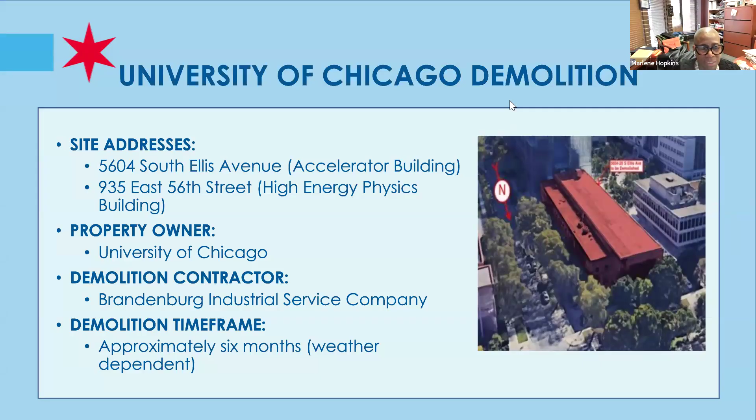The University of Chicago's Accelerator Building was constructed in 1949, and the High Energy Physics Building was constructed in 1967. The buildings house 2 particle accelerators: one Betatron that generated gamma rays and other particles for physics research, and one cyclotron that was at one point the world's most powerful particle accelerator. The Betatron building was decommissioned in 1965, and the cyclotron was decommissioned in 1972. These buildings have since been repurposed for other science projects, office spaces, and other uses for the university.

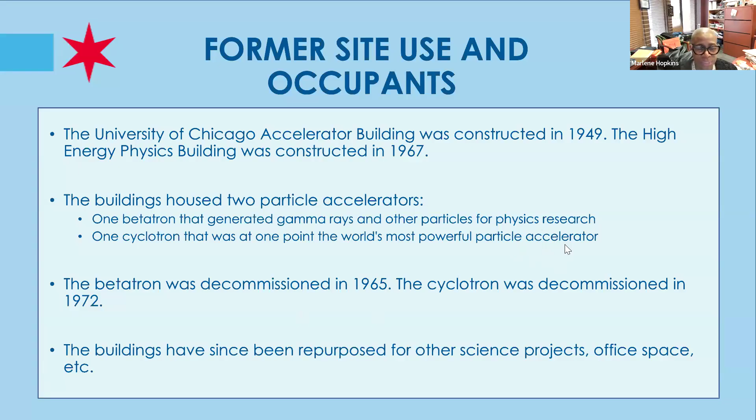The Department of Buildings required the contractor to submit a structural condition report, which details the current structural integrity of the building. They were also required to submit a safety and operation plan that details compliance, describing how the project will comply with the applicable requirements of Chapter 33 of the Chicago Building Code. We also were responsible for performing a preliminary inspection, known as the pre-demolition inspection.

We will have an inspector on site during the entire time the demolition work is in progress, and we will also perform a final inspection once demolition is complete. I would like to note that the structural condition report and safety operation plan are submitted to the department, stamped and signed or designed by a licensed architect or structural engineer, and the site operation plan can also be prepared by the demolition contractor.

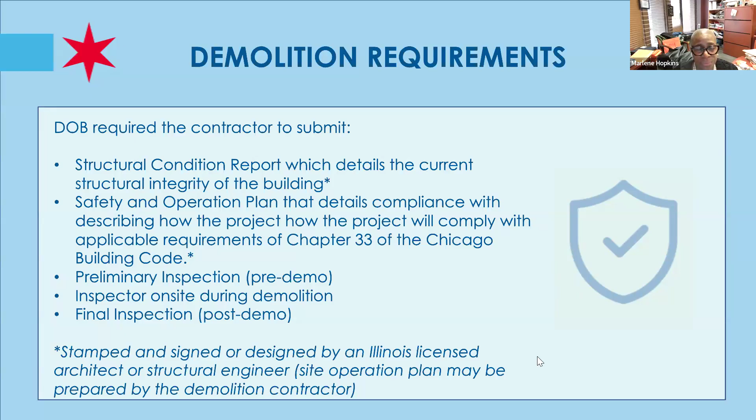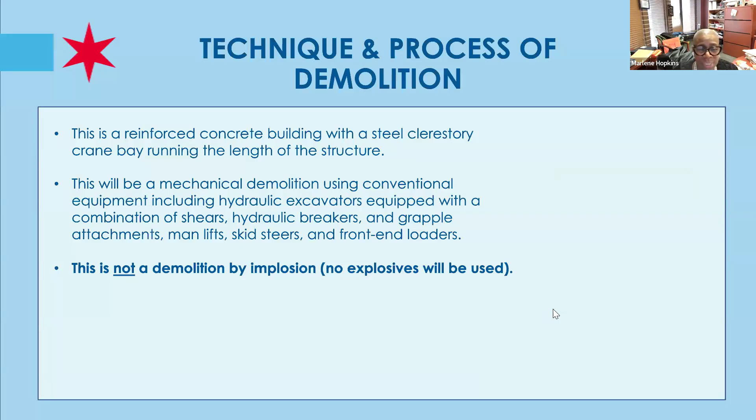This is a reinforced concrete building with a steel clerestory crane bay running the length of the structure. This will be a mechanical demolition using conventional equipment, including hydraulic excavators equipped with a combination of shears, hydraulic breakers, and grapple attachments, man lifts, skid steers, and front end loaders. This is not a demolition by implosion. No explosives will be used.

At this time, I will turn it over to my colleague, Dr. Ige, for the Department of Public Health presentation.

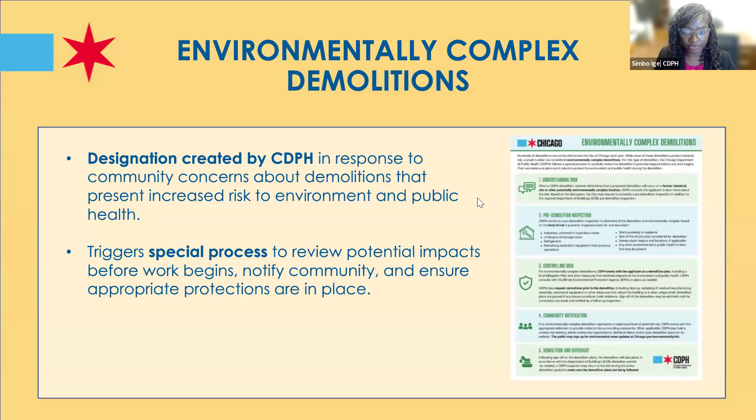Thank you, Commissioner. So Commissioner Hopkins has given you an overview of the structural components of this. So my role is to go over why we designated this as environmentally complex. This designation was created by CDPH in response to community concerns about demolitions that presented an increased risk to the environment and to the public health.

Now, the reason concerns have driven this process is that when we designate a demolition as environmentally complex, we have to have a community engagement meeting to help people understand how we have guaranteed public health in this process. So we have a special process to review potential impacts before the work begins, to notify the community, and to ensure that appropriate precautions are in place.

And our process for environmentally complex demolition, we have a flyer, and we can put the link in the chat for you so you can read it in detail. But we look at the risk, we do the pre-demolition inspection, we control the risk, we do community notification, and we do oversight of the demolition. Next slide, please.

So why did we designate this demolition as environmentally complex? It is because of radiological concerns. You have heard of Betatron and cyclotron and particle accelerators, etc. So there is potential for radiological exposure here, and we wanted to be sure that that is completely mitigated and addressed before demolition happens. This facility housed 2 massive particle accelerators, and we wanted to be sure that before it is demolished, that is thoroughly remediated before things start to come down. Next slide, please.

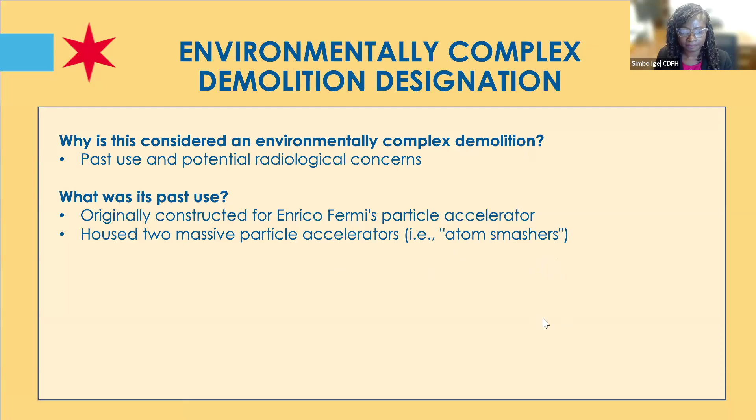So we required that the contractor assess for any asbestos and abate the asbestos. That has been completed. We also required that before demolition any hazardous waste be removed and disposed of. That has also been completed. Lead is also something we're concerned about, again, because these are buildings from before 1970. So inspection for lead happened, and that has been completed. We also, as part of our environmental consideration, require that demolitions recycle or reuse at least 50% of uncontaminated construction or demolition debris, and we will evaluate this during the demolition.

In this instance, the property owner was required to receive final confirmatory release letters from the Illinois Emergency Management Agency for the buildings to be fully released from radiological control and removed from the university's radiological license. This was used for radiological purposes in the past. We needed a third party, IEMA, to assure us and issue a letter that all radiological controls have been removed and there is no ongoing license for radiological use for this building. So the removal of the license is in progress.

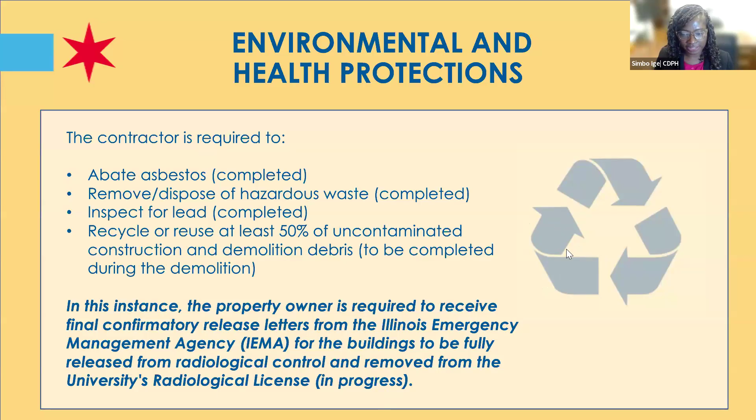Next slide. Now, dust - I mentioned asbestos, lead, and the radiological consideration. Dust is the other thing we're concerned about when buildings start to come down. So dust control is also something we look out for because it has negative impact on community members who might be close by. So there are 4 air monitoring devices that will report data at 15-minute intervals to ensure air quality is safe per EPA requirements. The air monitor is to ensure that there is no fugitive dust, that nothing is leaving the premises to go outside into the community.

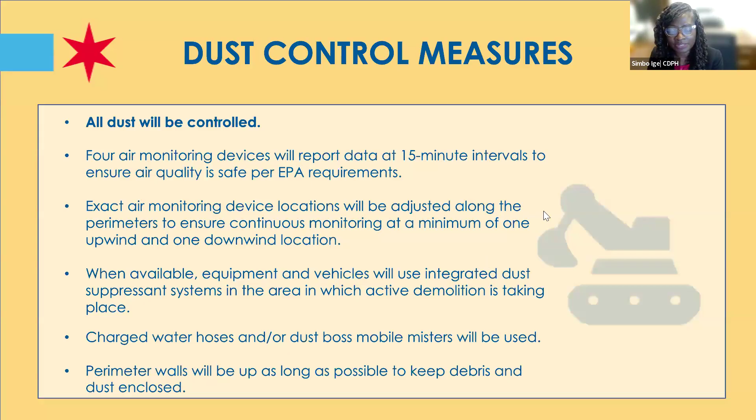The exact air monitoring device locations will be adjusted along the perimeters to ensure continuous monitoring at a minimum of 1 upwind and 1 downwind location. So the monitors must be placed where one will catch upwind and one will catch downwind at a minimum, and 15-minute interval monitoring is what we will be looking out for.

When available, equipment and vehicles will use integrated dust suppressant systems in the area where active demolition is taking place, so vehicles and equipment should not be tracking dust. Charged water hoses and dust boss mobile misters will be used. A dust boss is a machine that sprays water to weigh down dust so it comes to the ground instead of being dispersed into the air. That is also required for this demolition.

Perimeter walls will be up as long as possible to keep debris and dust enclosed. So these are the dust mitigation strategies: monitors, air suppressants, dust bosses and water hoses, and vehicles and equipment must not track dust outside the premises. There will also be perimeter walls to control traffic coming in and out.

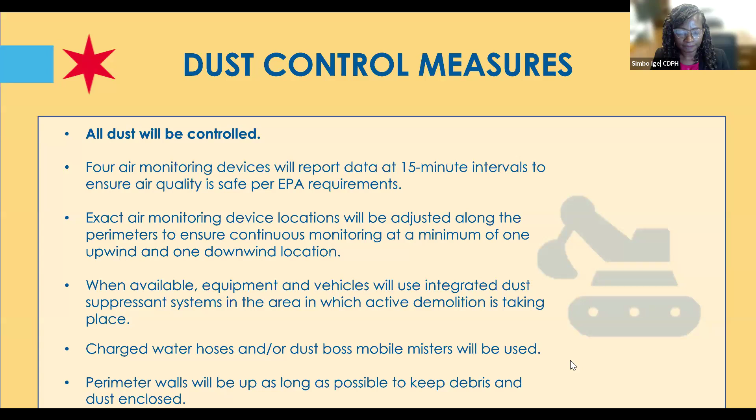The Department of Buildings and CDPH inspectors will be on site before any demolition to make sure all required controls are in place, with Buildings looking out for structural issues and CDPH looking out for public health related issues. We will also be on site daily during active demolition to observe. If anything goes wrong, we both have authority independently to stop any work that could be a public health hazard and correct issues as needed.

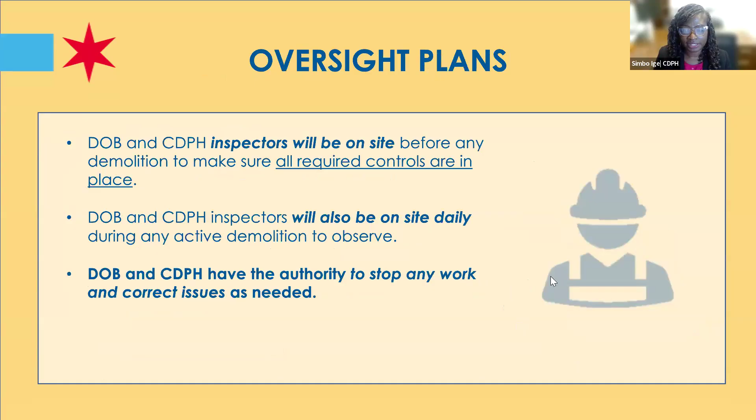Now I will pass it on to the contractor to tell you what precautions they have put in place. But those are the things that we have looked out for before we issue a permit for this demolition to proceed. So, Brandenburg?

Thanks, Dr. Ige. Again, I'm Robert Stevenson with Brandenburg. I'll walk you through the demolition portion of the work. As Commissioner Hopkins mentioned, we're looking at two separate structures here: one at 5604 South Ellis and the other at 935 East 56th Street, also known as the Accelerator Building and the HEP Building.

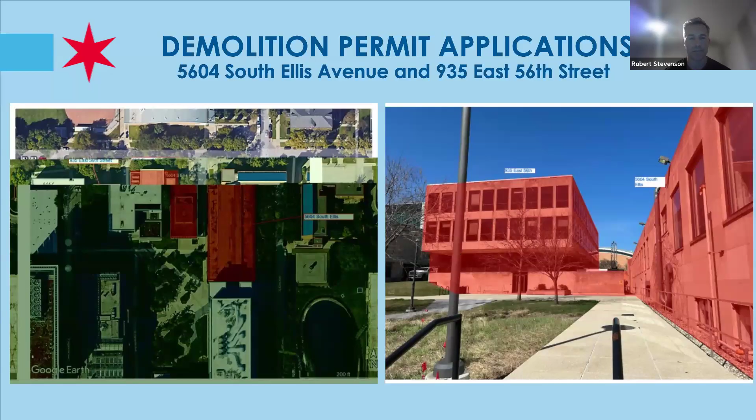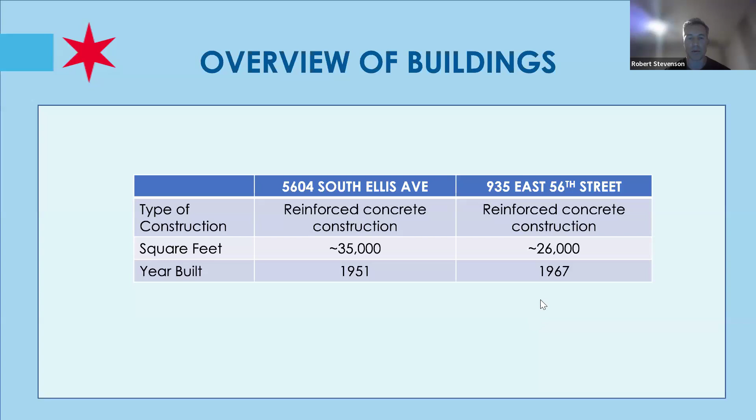As mentioned earlier, both of these structures are reinforced concrete construction. The building at 5604 South Ellis is approximately 35,000 square feet, built in 1951. The 935 East 56th Street building is approximately 26,000 square feet, built in 1967.

Hazardous materials and universal waste. I'll cover these two slides and let you go back to process if you don't mind.

Arthur Del Muro, Executive Director of Capital Project Delivery for the University of Chicago. As Dr. Ige mentioned, we've done an enormous amount of work to assure that we are taking care of the environmental considerations on the project. This first slide talks about our universal waste and chemical waste conditions, our asbestos conditions, and our lead conditions.

The university has completed a survey and has removed all chemical waste and all universal waste from the project in 2024. Subsequently, we also did an asbestos survey in 2023, and over the course of 2024 and 2025 we have removed all asbestos materials through a licensed abatement contractor. In 2024, we've done a pre-demolition lead assessment of the building, and that lead assessment will be used as a tool during the demolition process so we can segregate lead-containing materials and non-lead-containing materials for their proper disposal.

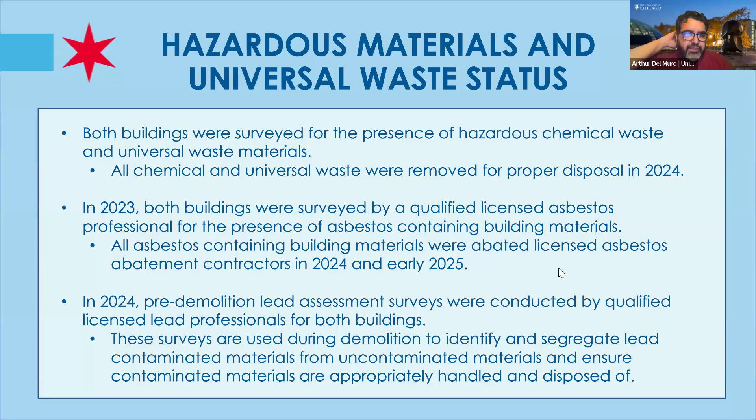As Dr. Ige mentioned, radiological safety is of great importance on this project. It occurs over a two-step process. The first bullet point talks about the University of Chicago's efforts: we have completed a comprehensive radiological survey on both buildings and determined that they meet the criteria for an unrestricted release from radiological control. Then the Illinois Emergency Management Agency, the second bullet, comes in and does a confirmatory survey to confirm these buildings meet that criteria, and they provide a release of these buildings from the university's radiological license.

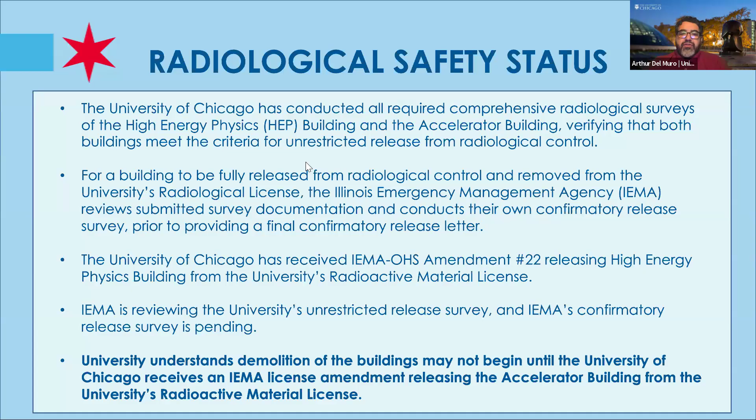Currently, the university has received Amendment 22, fully releasing the HEP building, the 56th Street building, from the university's radioactive material license. We have completed our survey for the Accelerator building, and IEMA is currently performing their survey of our documentation. They are completing their confirmatory survey, scheduled to complete in mid-May, and we anticipate they will also provide us with an amendment to release the Accelerator building.

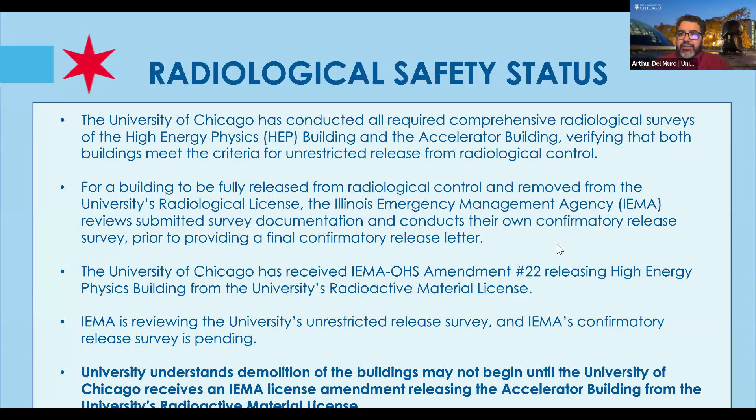I wanted to point out in bold that despite receiving all of the other regulatory requirements for the demolition of the building, the university will not and cannot tear down the Accelerator building until we complete this step from IEMA releasing the building from our radiological license. And then I will hand it back over to Robert to continue with the process of the demolition. Thank you.

Thanks, Art. As mentioned earlier, this will be a controlled demolition activity for both of these structures. Essentially, what that means is that we're going to be using machines to take the buildings down conventionally. There will not be any implosion methods utilized for this project.

The buildings will be removed. The slabs and foundations will be taken out of the ground as well, but we will not be taking any soils off-site for the demolition work. The process for the demolition and foundation removal is anticipated to take 6 months or less.

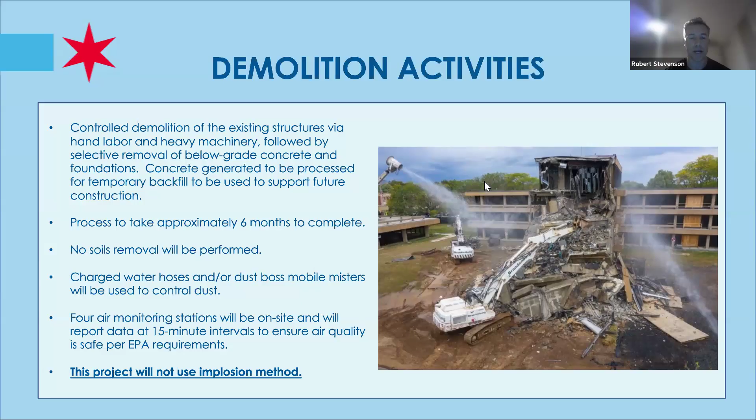We will be using charged water hoses and/or dust bosses to control dust on site, as Dr. Ige mentioned earlier. You can see a picture of those dust bosses in action there on the right. We will also be using the 4 air monitoring stations on site to track dust in 15-minute intervals, as mentioned earlier. Next slide, please.

For truck traffic, most truck traffic will be coming east on 56th Street. On the north side of ACC and HEP, they will be coming into the site behind Jersey barriers and fencing to get loaded. Once they are loaded with their demolition debris and/or steel, they will continue down 56th Street off to the east and off the site.

We do have some site vehicle access points that will be cleaned to prevent dust emissions. If there's any dirt of any type that is removed from the site, we will have sweeping activities as well on the streets. There are some permits that have been obtained already to close the sidewalk on the south side

of East 56th Street, as well as the west side of Ellis Avenue in front of the buildings. Parking lanes will be closed in both the north and south East 56th Street, as well as the east and west on Ellis Avenue for the duration of the project.

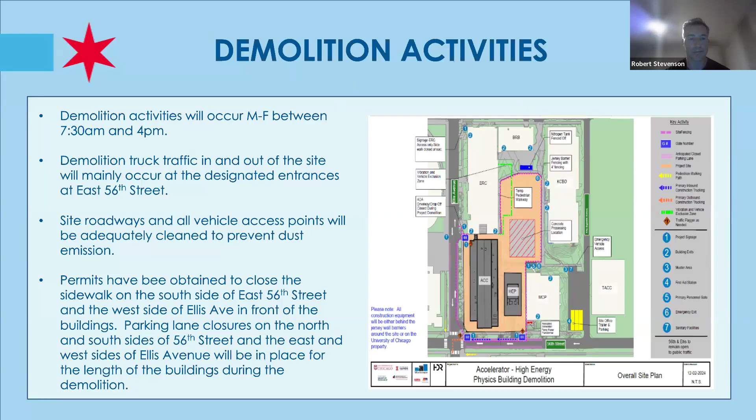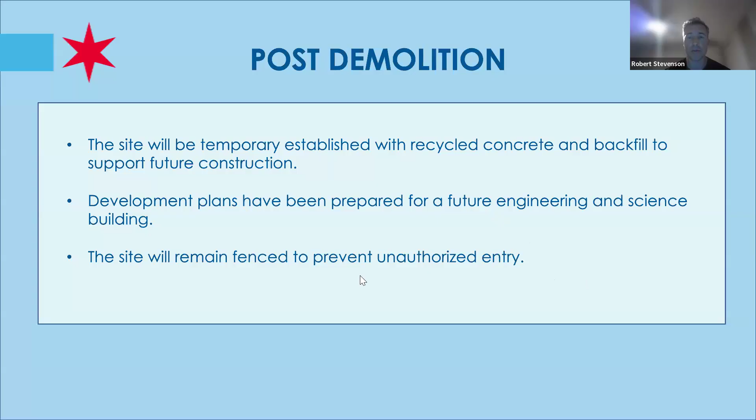Post-demolition, we will be using recycled concrete to backfill the basement voids and spaces removed from the foundation removal. That will help support future construction activities. We will be developing plans for a future engineering and science building there that is a separate project. And the site will remain fenced entirely for the duration of the project to prevent any entry into the facility.

Next slide. And that's all.

Okay, thank you everyone for these presentations. I think we can now go ahead and get to the questions. We only have one so far, which is where is BOWA Construction? That's BOWA. Is there someone on the panelist list who can answer that?

Yes, thank you. I can answer that. BOWA Construction is a member of our construction management team, along with contracted through Mortenson. This presentation is concentrated on the demolition, and BOWA's engagement is related more to the new construction.